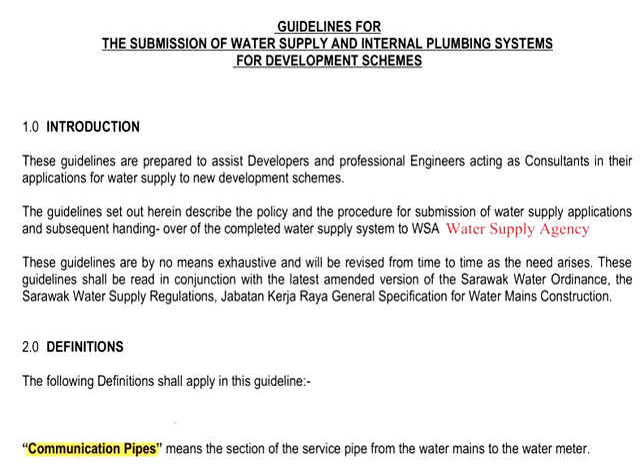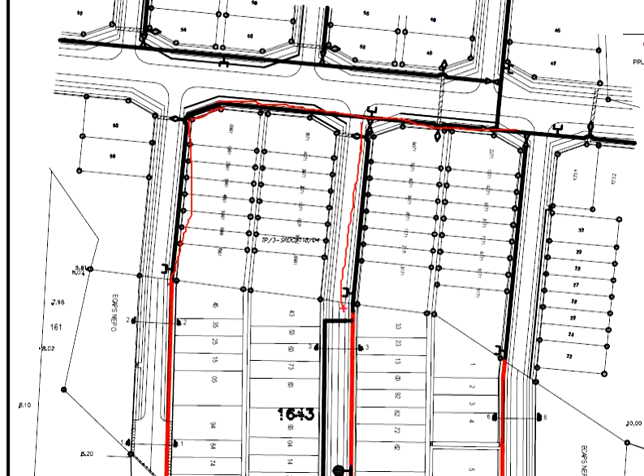Now, before we start, let us look at some terminologies so that you have a better understanding of the terms we are using in discussing the guidelines. First is the communication pipes. It means the service pipe sections connecting the water mains to the water meters. We call the pipes that we are designing the water mains instead of calling them pipes. The reason is that the size is relatively large. That means the piping system that we are designing for the water reticulation system here is known as the water mains.

Now, what about the water meter? This is an example of the water meter. You see this in front of a property. Let's say you are talking about a residential unit. Normally, there will be a water main crossing in front of the residential unit. And before the water enters the property, there will be a water meter to quantify the water volume entering the unit, so that the water supply agency may charge according to the consumption of water used. The water mains look something like this.

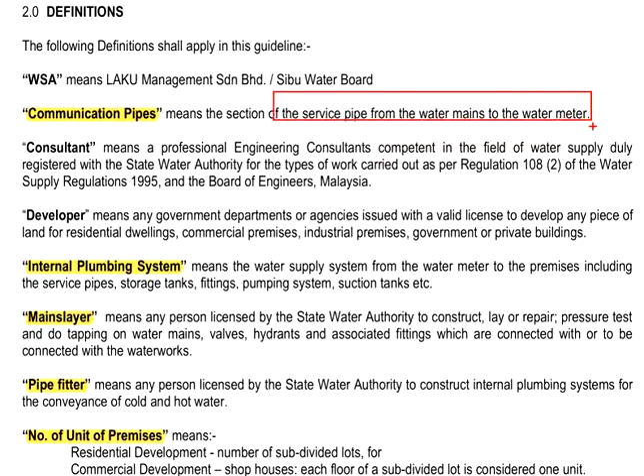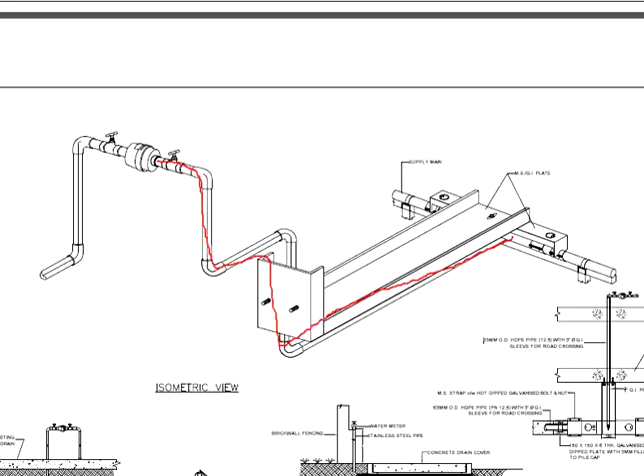Now, when we talk about the communication pipe, based on the definition here, the part connecting the water mains and the water meters is known as the communication pipe. Taking this as an example, this is the water mains, and there is a pipe connecting the water mains to the water meter before entering the building. Now this stretch here is known as the communication pipe.

Next, internal plumbing systems. It means the water supply system from the water meters to the premises, including the service pipe, storage tank, fittings, plumbing system, suction tank, etc. Based on the definitions, starting from the water meters onward, entering the premises is known as the internal plumbing system.

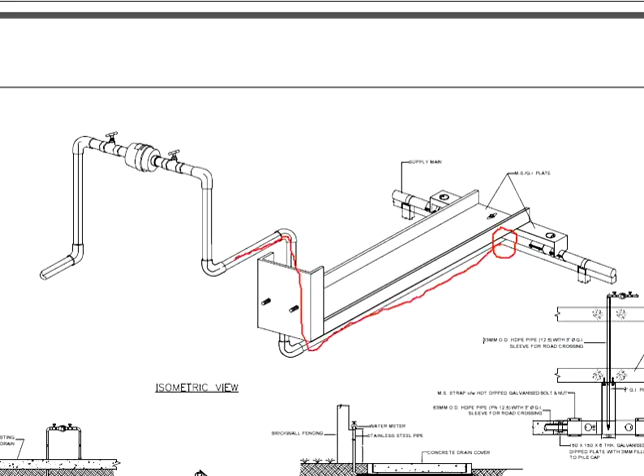As far as the engineers are concerned, we are designing the water supply mains, ensuring the structural stability of the water mains as well as adequate pressure in the water mains. As far as the developer is concerned, they will have to take the water from the water mains, connecting to the water meters, and then entering the premises. Starting from the water meters entering the premises, that will be the architect's scope. Next, we talk about the mainslayer.

This is the licensed personnel to construct, lay or repair, and deals with the constructions of the water mains. As for the pipe fitters, it means licensed personnel dealing with the internal plumbing systems.

The water supply system here means the water supply system from the point of connection to the existing water mains, determined by the water supply agency, to the developed areas. This includes the internal reticulation mains, sub-mains, booster pumping system, reservoir, and other water supply related appurtenances in accordance to the requirements by the water supply agencies.

In other words, the water supply system here is referring to the entire system connecting to the existing main that is supplied to the developed areas. Taking this project as an example, this is the existing water supply system. We have existing mains here, and then this is the new development.

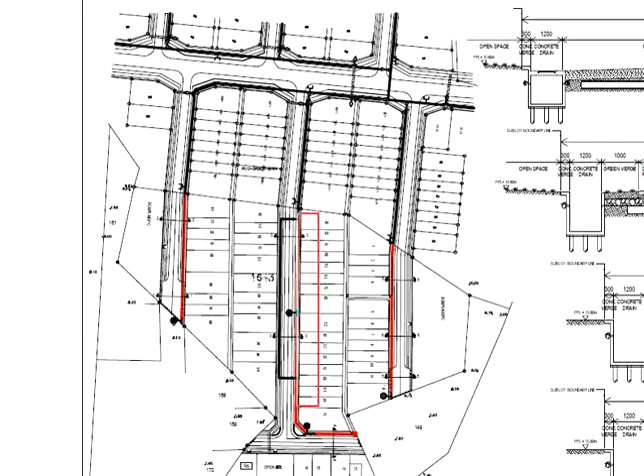Now the networks of the water mains here are considered as the water supply system. Whichever components come together with the system shall be considered as a part of the water supply system. This includes the fire hydrant, sluice valve, water mains, air valve, and etc.

Next, we talk about the definitions of the numbers of units of premises. This is very important, especially when it comes to the requirements on the basis of the numbers of premises. Now, if it is a residential development, each sublot will constitute one premise. The total number of premises will be the number of subdivided lots.

Taking this development as an example, if this development is for residential, the number of premises will be quantified by the number of sublots. Let's say the total number of sublots is 50. 50 is the number of premises.

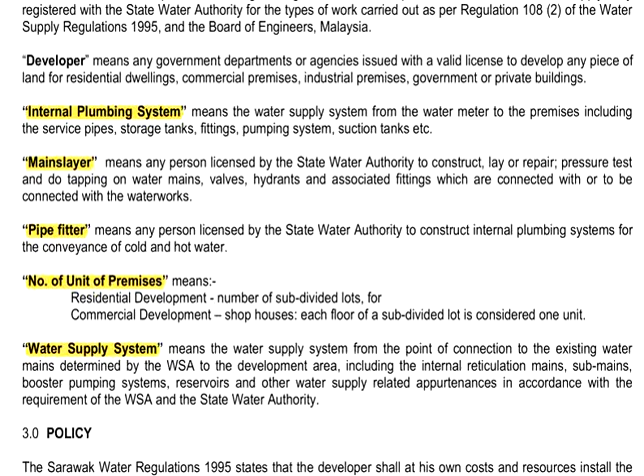However, if you are talking about commercial development, for example, shop houses, each floor of a sublot is considered as one unit. On this basis, the number of units of the premises is governed by the number of stories of the shop houses, as well as the number of subdivided lots.

Taking back this example here. Now, if this development deals with shop houses, let's say we have a total of 50 units of subdivided lots. Each shophouse has 3 stories. Now the total number of premises would be 50 times 3. That gives you 150 units of premises.

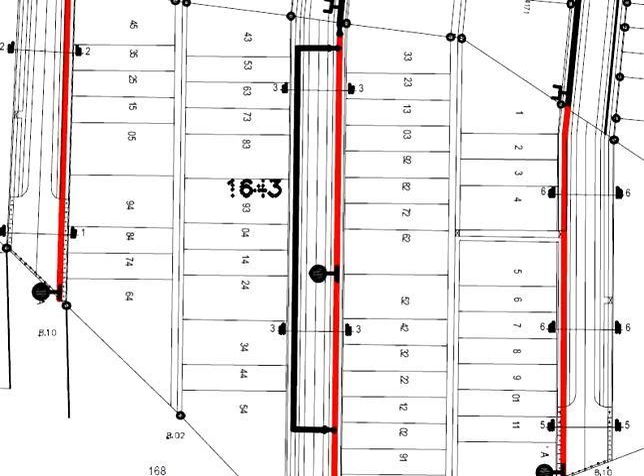Next, let us briefly look into the policies. The developer should, at its own costs and resources, install the whole water supply system, including whatever is necessary. And the water supply system should be tied into the existing water mains as directed by the water supply agency at the cost of the developer.

In other words, it is the responsibility of the developer to construct the water supply system and ensure it to be functional. Whatever is necessary should be provided, everything at his own cost. Now, the water supply system will have to be tied into an existing water main so that the water supply can reach the developed areas.

This will need to have the input from the water supply agencies, getting the agreement and approval by the water supply agencies. The water supply system will need to be designed in accordance to the requirements by the agencies.

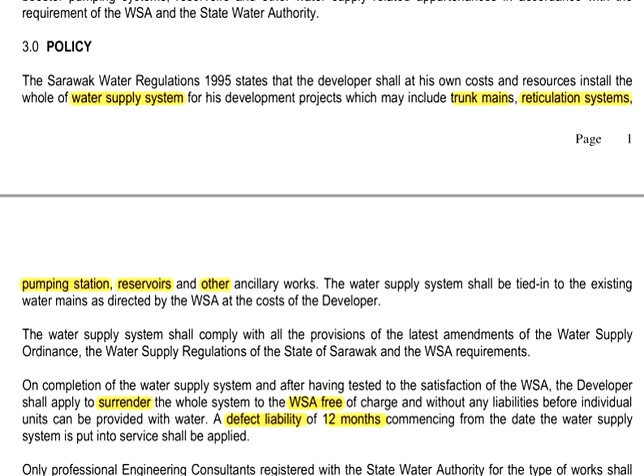Once it is completed, and after having been tested to satisfaction, the developer will have to hand over the entire system to the water supply agency free of charge before the individual units are to be provided with water. The water supply agency carries no liability over the water supply system, accepting the handing over by the developer.

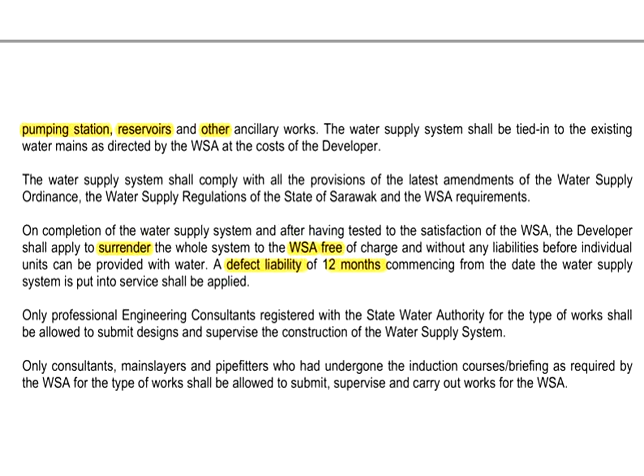There will be a defect liability period of 12 months, calculated from the date of the water supply system being put into service. Now, the submission should be done only by the professional engineering consultant registered with the state water authorities.

Only consultants, mains layers, and pipe fitters who have undergone the induction course or briefing as required by the water supply agencies are allowed to submit, supervise and carry out the work for the water supply agencies. This is to ensure the personnel has relevant competency in carrying out the works.